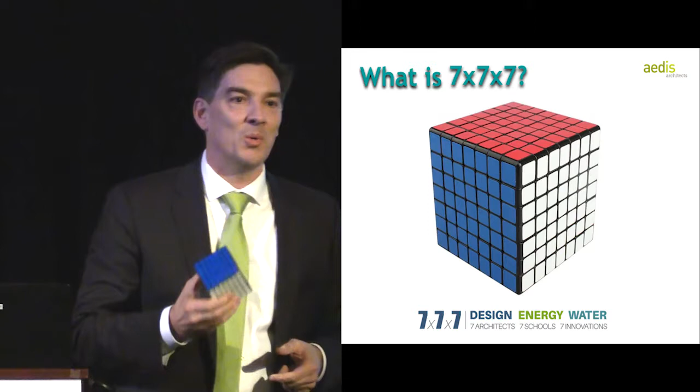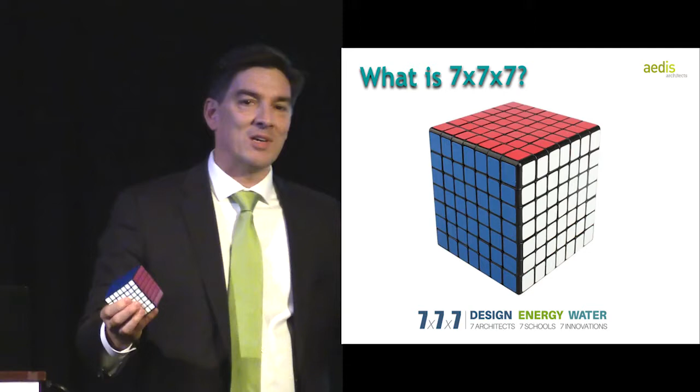When I was 10 years old, I had the little 3x3. You remember that one? It was unsolvable, I didn't know how to figure it out. I asked my buddy Mike, who was the smartest kid I knew. He went out and bought a book - this was before YouTube and the internet. Ultimately, me and my friends got together and solved it by breaking it up into little pieces and cramming it back together again. I think many of you probably did the same thing.

So why do I tell you that story? Because once upon a time, net zero energy was an unsolvable problem.

Let's say 10 years ago, when solar was 10 or 12 bucks per installed watt, solar was ridiculously expensive. Wind wasn't really an option. Good building systems level performance modeling was kind of voodoo - it wasn't really science.

But now all of that's kind of changed, right? We've sort of solved it - you've just heard how in new construction, net zero is becoming commonplace in a lot of locations, and it's possible.

Okay, sorry, lost my train of thought. But Chet didn't ask us here to talk about new construction. In fact, in a few years, new construction is going to be mandatory - it'll just be code compliance to be net zero. But Chet's asked us to look at all of the millions of square feet of existing infrastructure ahead of us. It's sitting on our books as liabilities, and that's our current unsolvable problem.

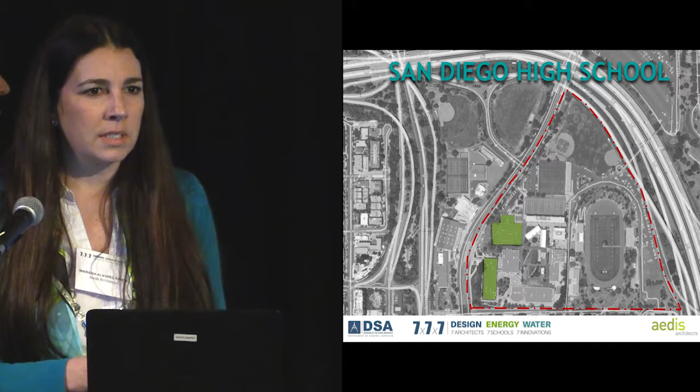San Diego High School is in an urban setting. It's south and east of Highway 5 as it wraps around downtown San Diego, where it intersects the 163. It's approximately a 32-acre site with 10 buildings, some 2-story and some 3-story.

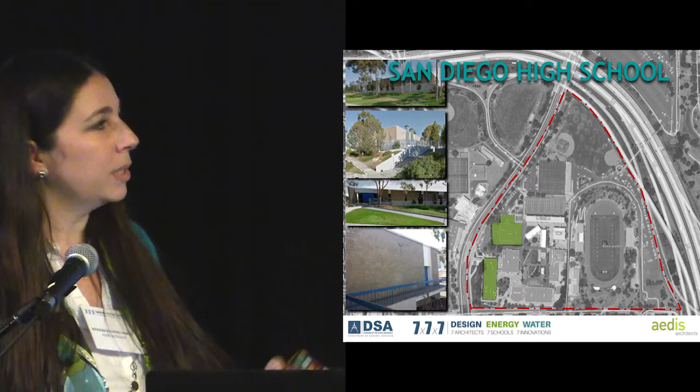We were asked to look at the Gymnasium building and a 2-story building south of it that is a classroom and administration wing. Before doing that, we also wanted to see the capacity of the site and what would be our starting point. We always need a plan to see and a goal.

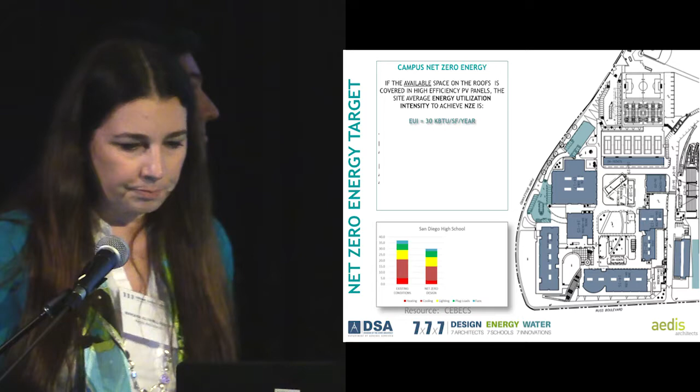The existing buildings combined average an EUI of approximately 37. If we were to maximize the space on the roofs, install high-efficiency photovoltaic panels, and reduce the EUIs to 30, this campus could be net zero energy. So that's our starting point, 37, and we want to bring it down to 30.

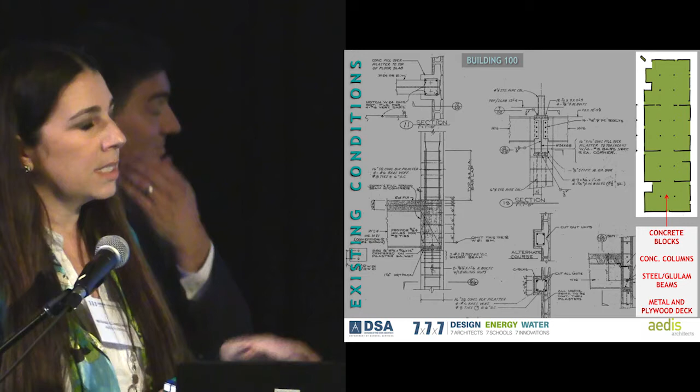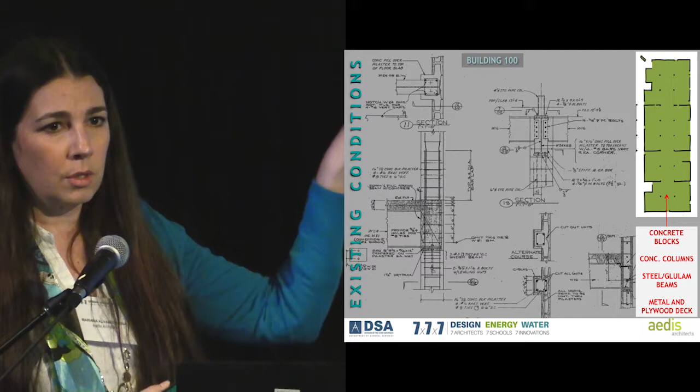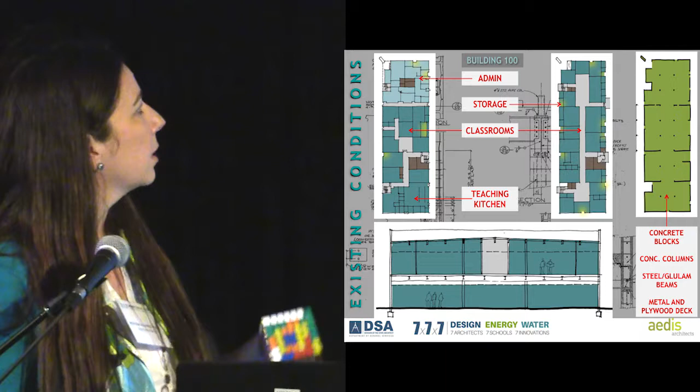Looking into the buildings, this is a 2-story building's structural diagram. It was built in 1976 with concrete blocks and continuous reinforcing, and all the perimeter walls and intermediate walls are solid concrete blocks. The first floor has the administration area, some classrooms, and a teaching kitchen. The second floor is all classrooms on both sides of a corridor.

This corridor ends in wider spaces that are currently not being utilized, and it calls for some rethinking. In addition, there are a series of small spaces along the perimeter walls used for offices or storage. So the very few classrooms lucky enough to have a window - it's actually blocked by this storage. The storage is the one with the window.

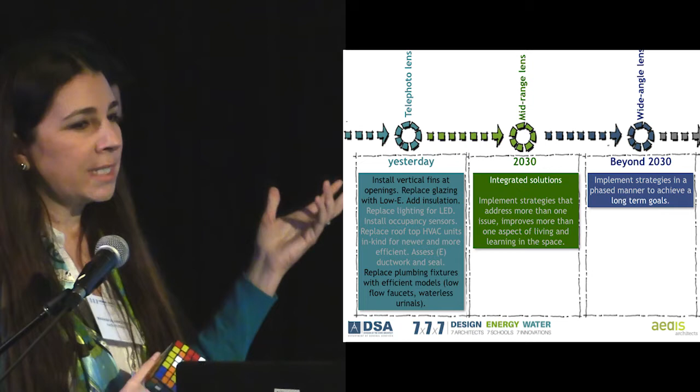Our approach, as John mentioned, was to zoom in and zoom out. We looked at this through different lenses. Right now is the close-up lens, which is what we consider yesterday's solutions that we already know and that has been mentioned multiple times today - replacing the lighting, adding smart controllers in the irrigation. We want to focus on the mid-range lens, and when we're scaling here, zooming out, we're not just talking about scale, we're also talking about investment and time.

We really want to look at those goals set for 2030, and looking at the strategies we apply today, we want to make sure they're good for what's coming up. There's more beyond 2030, and we want to make sure what we do now isn't reworked later but actually becomes part of achieving those goals.

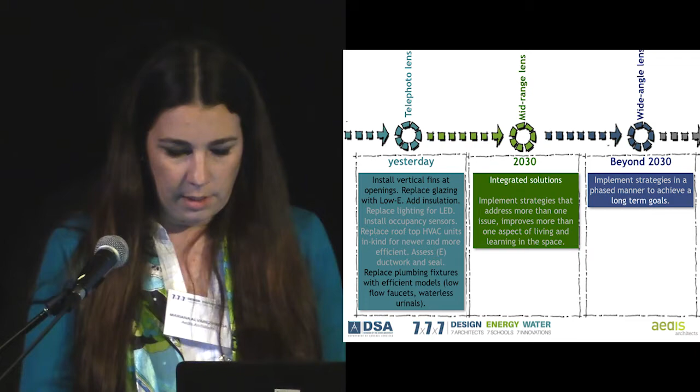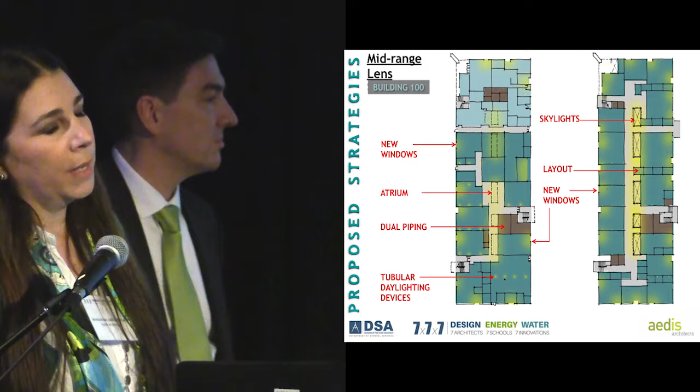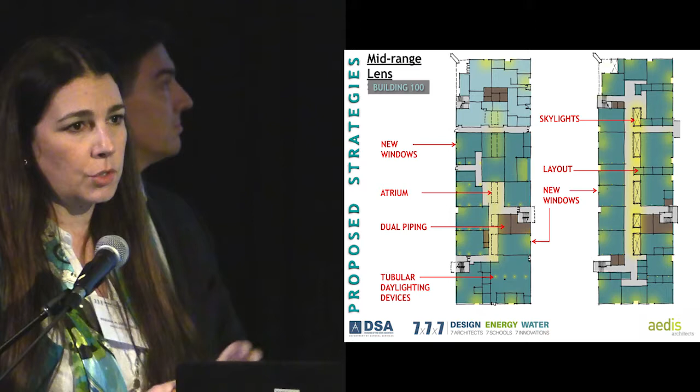So the mid-range lens approach takes intense work with more impactful benefits. We're suggesting relocating those smaller rooms on the perimeter walls, putting them between classrooms, freeing up those walls. By moving those non-structural partitions, we're able to widen the corridors and create an atrium aligned with a series of skylights to bring natural light all the way down to the first floor.

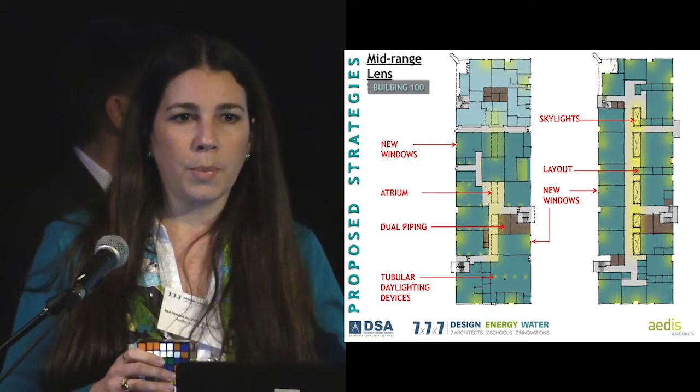We worked with a structural engineer to see how we can add views to those spaces. This is almost a 300-foot long elevation with only 4 windows that are 6 feet wide. We determined that from all that solid wall, if we cut open up to 10% of the area, that's enough to bring a window to all the classrooms. So we're proposing punching those windows open.

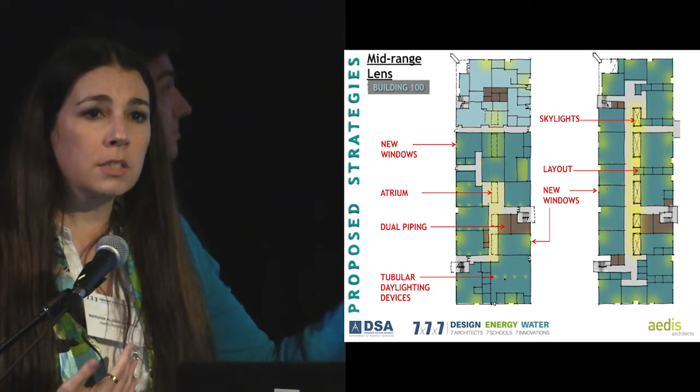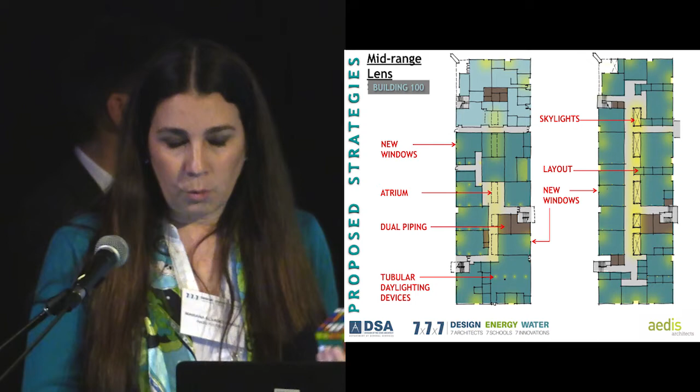Also, in these 14 years to 2030, there's going to be multiple bonds. So if in one of those cycles we can also prepare the plumbing system to replace it with a dual system, as Amy was talking about earlier, we're getting our building ready for when reclaimed water is available on site. Again, it's part of having the work continue over the years.

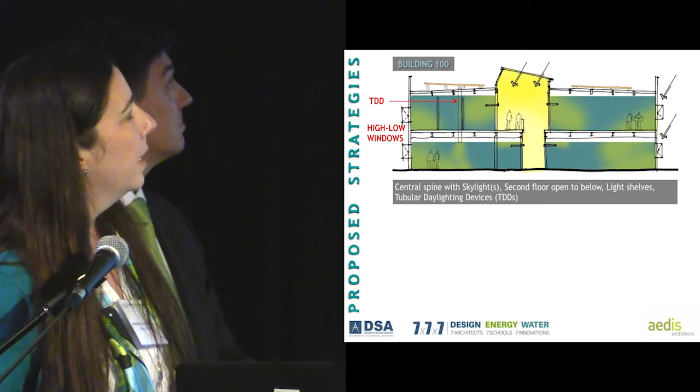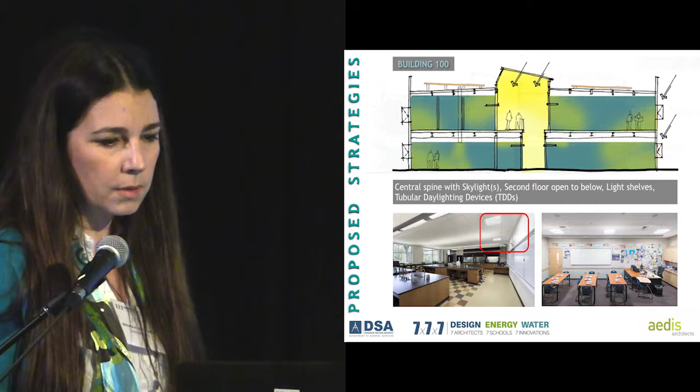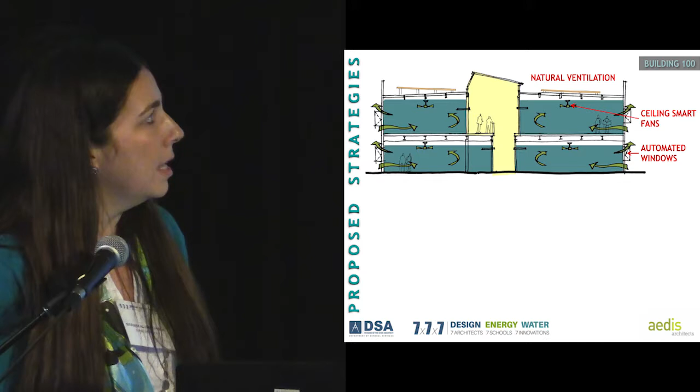Also including those tubular daylighting devices to bring daylight to the first floor, especially with how the technology has grown nowadays. The new windows would be high-low automated windows that can create natural ventilation in the classrooms, assisted with smart fans that can recycle air and make sure the air movement is even in the space.

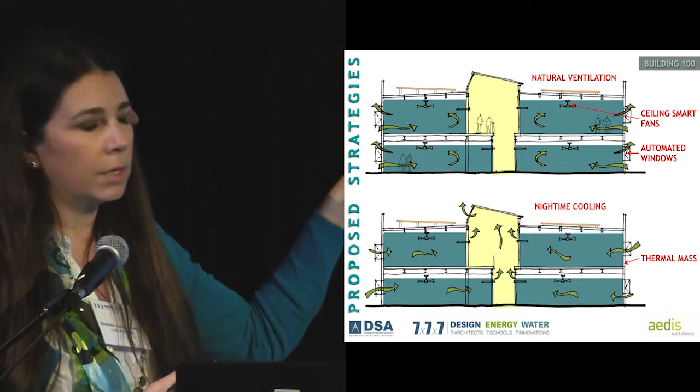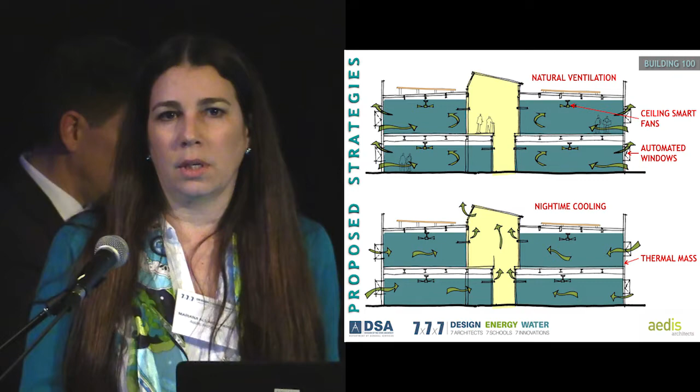But also taking advantage of climate zone 7 that San Diego is in, there's night cooling opportunities with high fog in the area. We'd be reversing that natural air by having it go through the window, through the classrooms, and up the atrium, creating a chimney effect to cool down. The thermal mass properties of the concrete walls can keep the spaces cool during the day and slowly release that heat exchange.

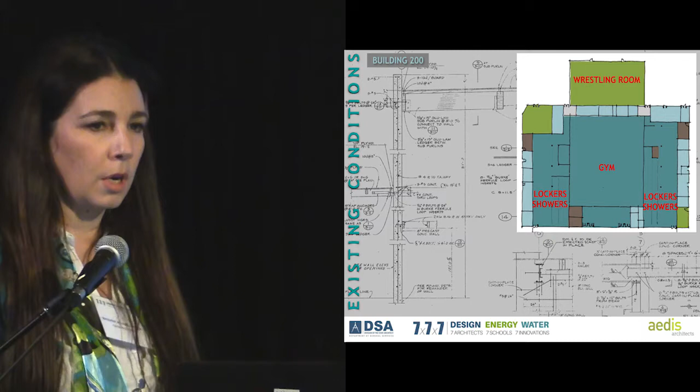The gymnasium, in a similar fashion, also built the same time in 1976, has concrete tilt-up walls for the big space and also the smaller ones, the locker rooms and the exercise room.

Very solid walls. We're proposing replacing this array of lighting with operable skylights, assisting the ventilation with Big Ass Fans, and similar treatment for the smaller spaces.

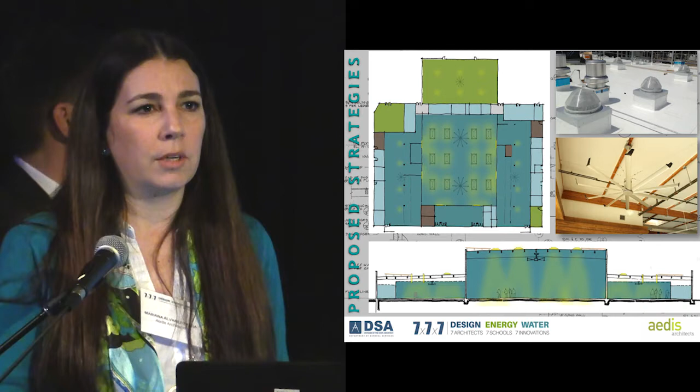Obviously views here are not a key priority, but we would be limiting the opening of those concrete walls for installing automated louvers that can create that high-low effect for air movement and improving the airflow.

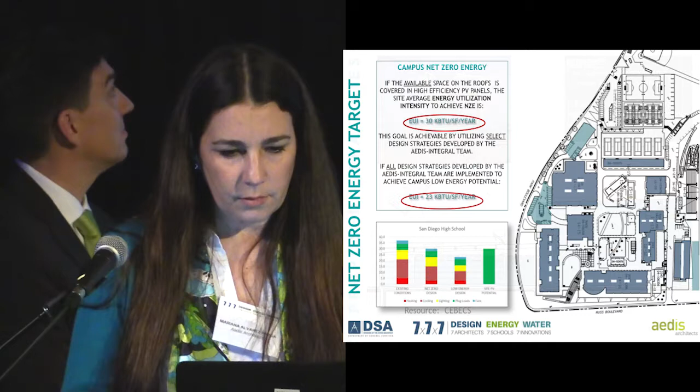So zooming out again and going back to the starting point, we said it was at 37, and if we can bring it down to 30, we could achieve net zero energy. Applying some of these measures, that's achievable. But if we apply all the measures I described, it could lower the EUI to 23.

So that is an opportunity to meet, and that's where the fun begins, when the district can actually meet and decide what strategies are important and can be applied to address more than one issue, and determine what's going to mandate the interventions. Is it purely energy? Is it student performance? Is it health? Is it all of the above?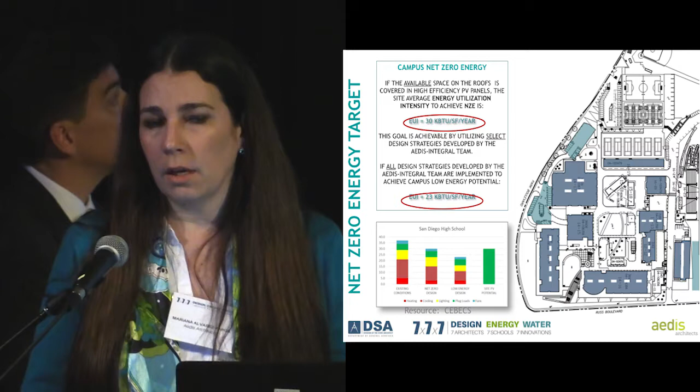So that's where the delta between 23 and 30 is where you can strategize. What's important is that it's not only the facilities and design team in those meetings—it's critical that the school board is part of it, so everybody knows what the plan is and what can happen.

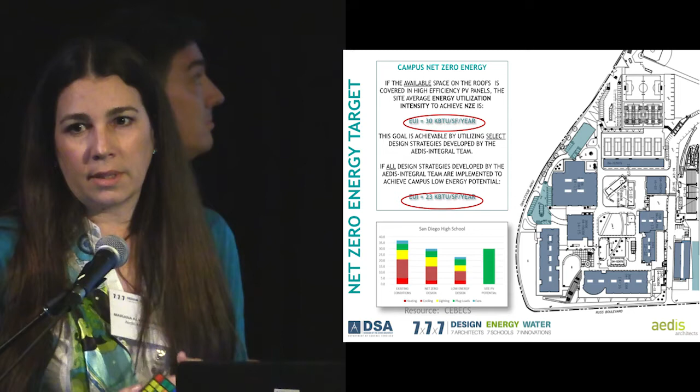But there's more to it, right? There's water that also needs to happen. And for that, I'll let John solve that.

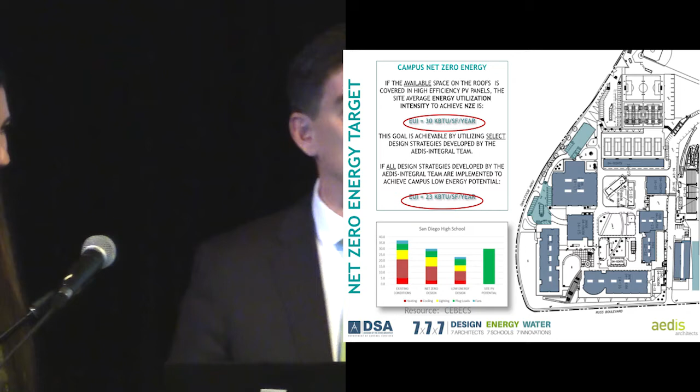All right, so energy used to be the unsolvable problem, and now I think it's water. So what is the definition of net zero water? It's where you can balance the available water income from natural sources—in most cases we're talking about rainwater—with the water uses that are on site: faucets, toilets, irrigation, kitchen uses, and so forth.

The other presentations, you heard all the same kind of strategies that we are approaching: drought-resistant landscaping, converting planting areas to xeriscaping or alternative surfacing, artificial turf, or hybrid grasses. Also gray water when the regulations will support it—this is another uncharted territory, looking for regulation change to allow gray water use on site, not just for irrigating plants. And going back to some of Amy's great closing-the-loop diagrams that tell the story about on-site water recycling and being the future, getting a regulatory environment that'll support that.

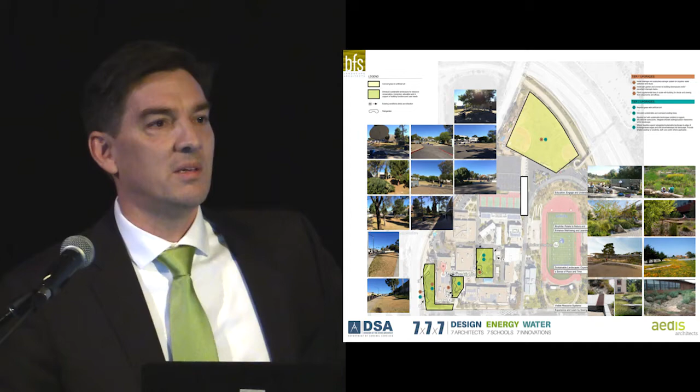But looking at most of California, you can calculate until the cows come home, there's just not enough rainwater to really offset the use of water on site. The boundaries are set, and the rainwater is either insufficient or at the wrong time of year, and you're always going to be in this catch-up mode.

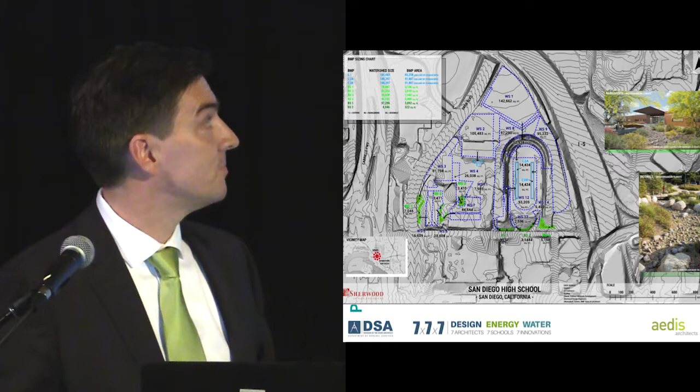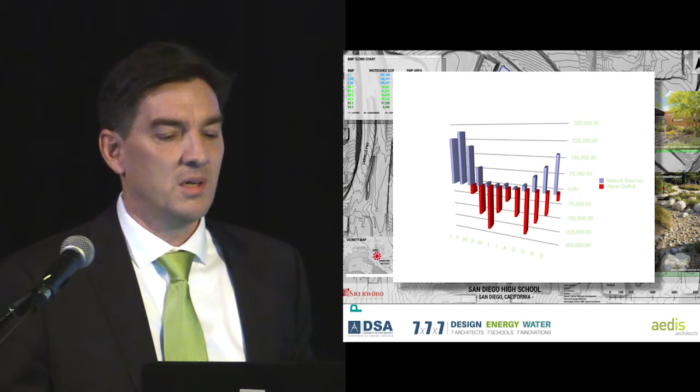I'm going to introduce the idea of the 3 dimensions of zero—time, money, and the amount of area you have to work with, the physical space, your site.

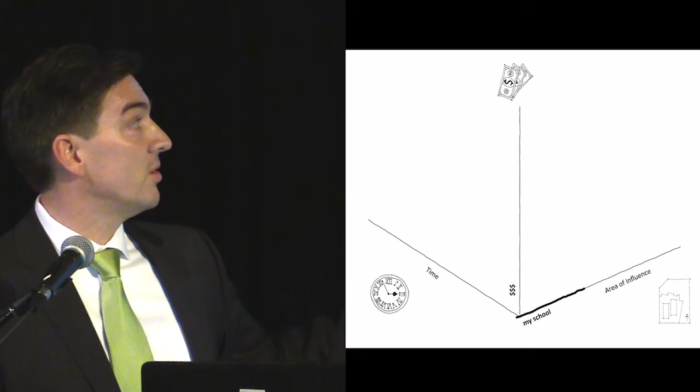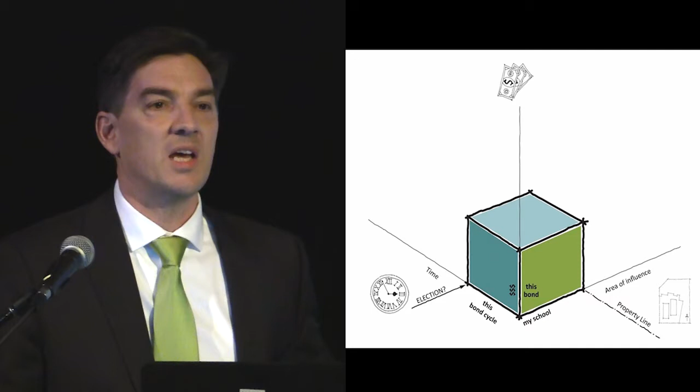So here is your school site, San Diego High School or wherever. This is your current bond, and this is your current bond cycle. This is the cube that we all operate in. We've done this for decades.

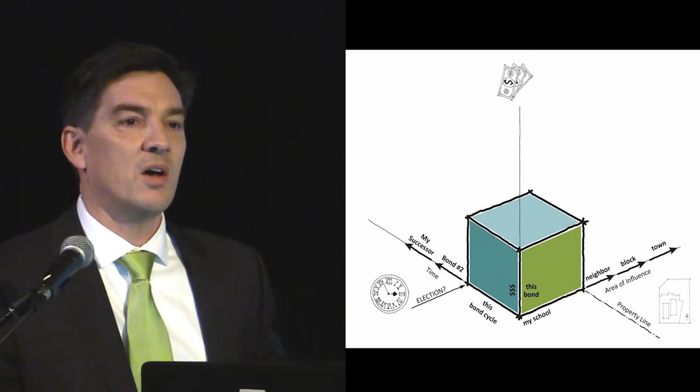There's your property line and your next election. But what about your neighbor's land? You're beyond your property line. What about your entire block or your entire city? When you start to change your perspective and zoom out, now you're starting to look at other sources of money—joint powers authority, public-private partnerships, your bond, your successor's bond, and the next generation of money. And this starts to redefine the solution area that we can work with.

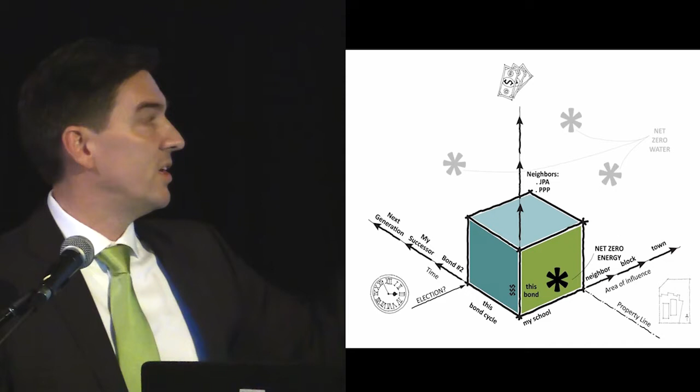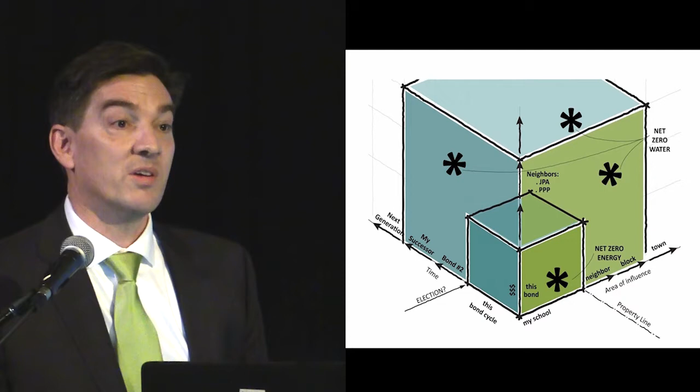Here's net zero energy—it's right within our box. But net zero water is out here. When we define that problem and change our perspective, the solutions will start to become more evident. And that takes vision, and it's going to take commitment beyond your own tenure.

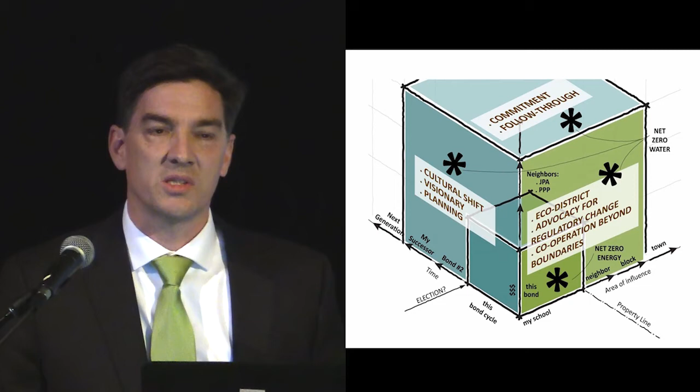I want to talk to you about eco-districts. An eco-district is any time multiple stakeholders, multiple properties come together and do joint investment in infrastructure for mutual benefit. So what does that mean for San Diego High School?

Well, it turns out San Diego High School is right on the edge of probably one of the largest open spaces in Southern California, Balboa Park, and it's on the downhill side—think about what that means to your water resources. If you go beyond the high school property lines, it's adjacent to the city college. Across the freeway you have the medical center, parks, zoos, and now imagine this as an entire watershed for both rainwater, but maybe also as a source for black water, sanitary, and storm.

And perhaps that purple dot down there isn't just a new decentralized water recycling plant to go with the 2 that are already in the county, but maybe it's actually a new curricular asset for the community college, where now the high school students and community college students can learn about water recycling and earn certificates, creating an entirely new career path and program for the college.

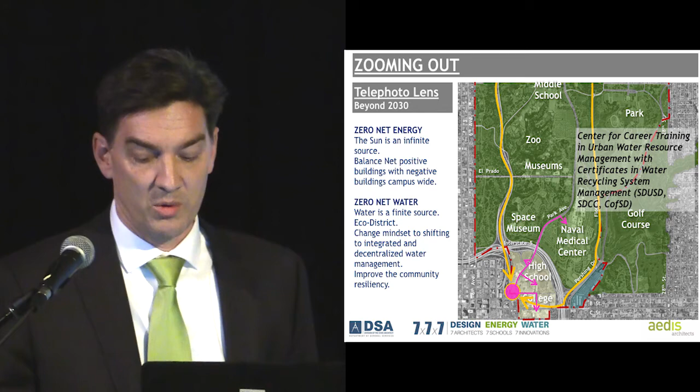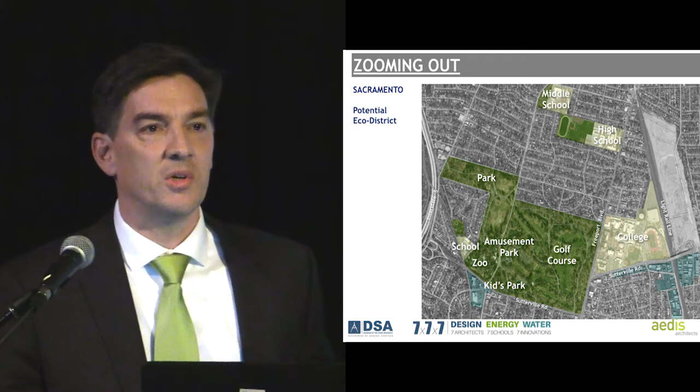So everybody that you've listened to today, if you zoom out and look at the entire state, everybody has talked about these various approaches, and they're all totally appropriate—whether it's technological, policy-related, fiscal. When we talk about eco-districts, it's a financial opportunity, a regulatory opportunity, a cultural opportunity.

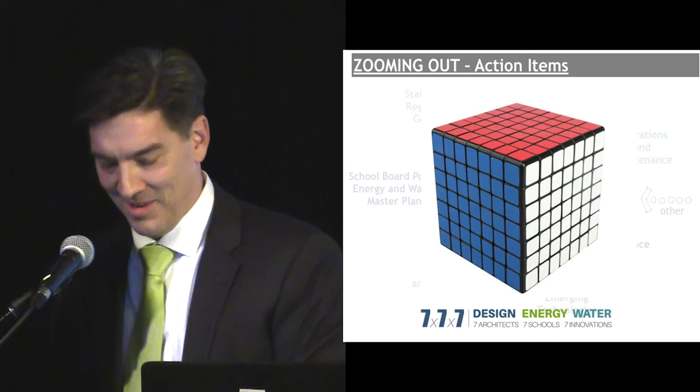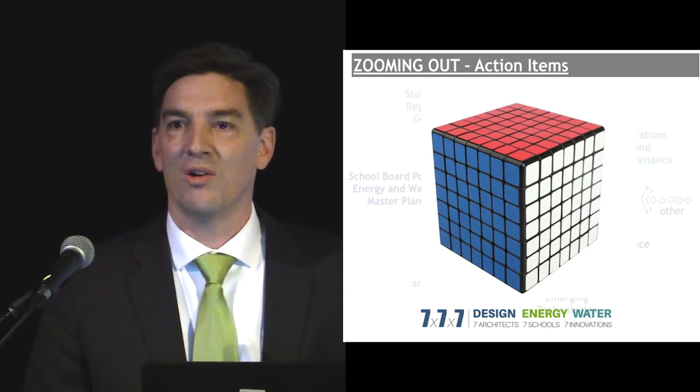And just to conclude, I think as we leave the stage, you're going to be compelled to applaud. But I'd like to say that instead of just applauding for the speakers, I'd like you to think of that applause as a commitment to the students of Elliott Ranch that have been in our audience, that we're committing to them that we won't be handing them a problem to solve, but a problem that has been solved. Thank you.